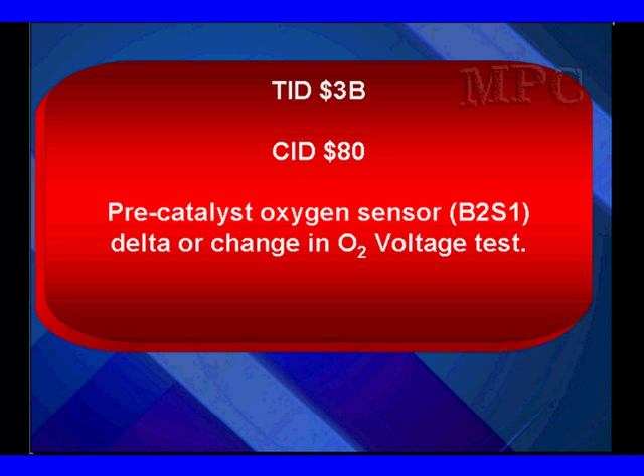This is test ID 3B, component ID 80. It's the pre-catalyst oxygen sensor, B2S1, showing the delta or change in O2 voltage. Component ID 80 indicates we have a minimum limit.

This is the left or front, transverse mounted engine sensor, when your dual O2 sensors are used for fuel control. The PCM times the change in O2 voltage during warm-up.

Special note to remember: JTEC sensors have 5 volts present when they're cold, but you can't measure them with a lab scope and you can't measure them with a generic scan tool. You may want to go back and review the JTEC O2 sensor operation section.

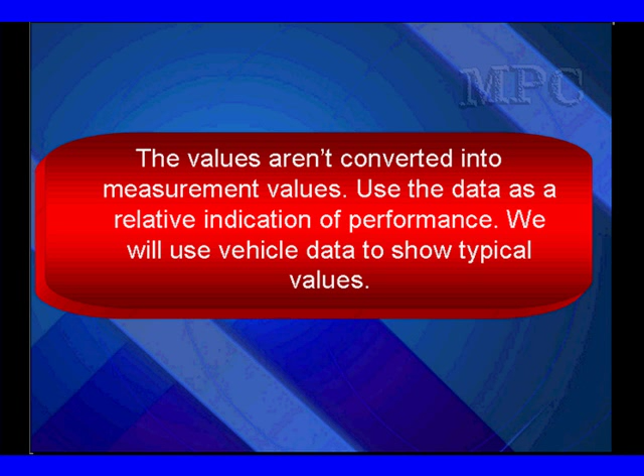The values aren't converted into measurement units by Chrysler, so use the data as a relative indication of performance. We'll use actual vehicle data.

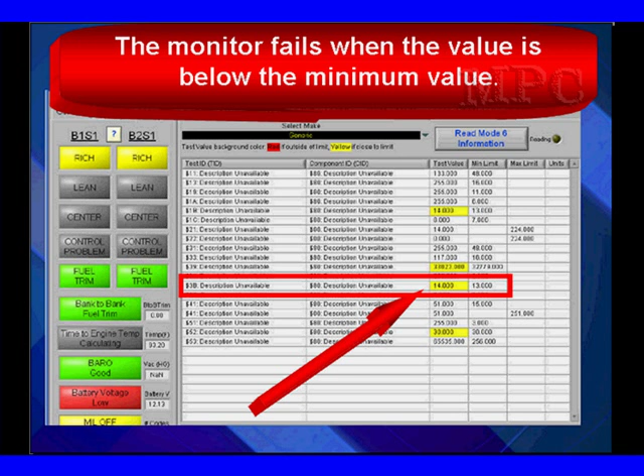Take a look at our 3B here. Under test value, highlighted in yellow, is 14. Under the minimum, to the right of it, is 13. We are barely passing the minimum spec. Now, you may want to test this because this looks like an impending failure.

As we take a look at these, we're going to be using a lab scope, and we're going to look at all of them. Right now we're looking at fuel control. Take a look at that - that's up there, that's where we turn the key on. At key on, the voltage jumps up. If we look at the scale on the right, we found it's about 1.8 volts.

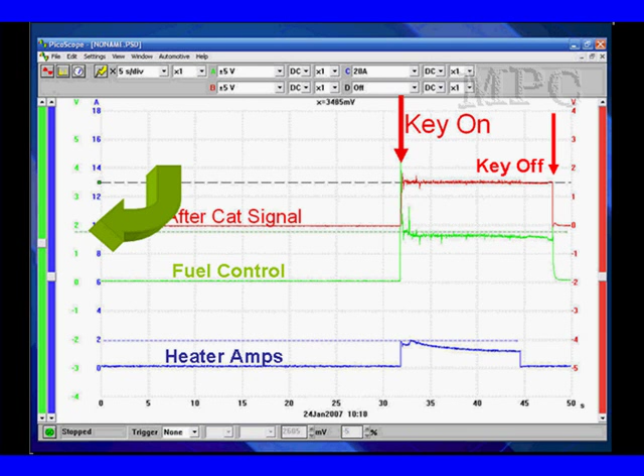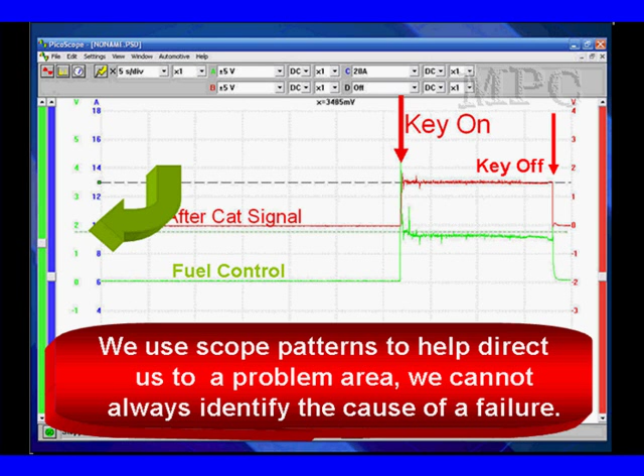We're showing you all these things because we're going to be using all of them together, including heater amps, during our analysis with a scope tester. So we're going to use scope patterns to direct us to a problem area. We can't always identify it with some of these patterns, but in this case it's pretty accurate. Let's go look at our scope patterns to see how to verify this heater performance.

We're going to start off this test drive totally cold and see what happens. We're graphing the fuel control in green, catalyst in red, and the heater current is in blue.

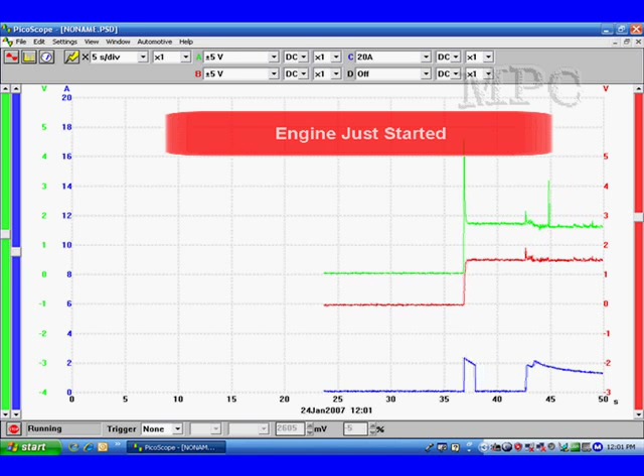We just started the engine and we just noticed our first activity. We're going to stop and talk about this when we get it in the center of the screen, because there's something unusual about JTEC O2 sensors. Let's take a look at the voltage levels on these two sensors - we'll stop it here and have a look at it. The fuel control is just under 2 volts and the catalyst monitor is about 1.5.

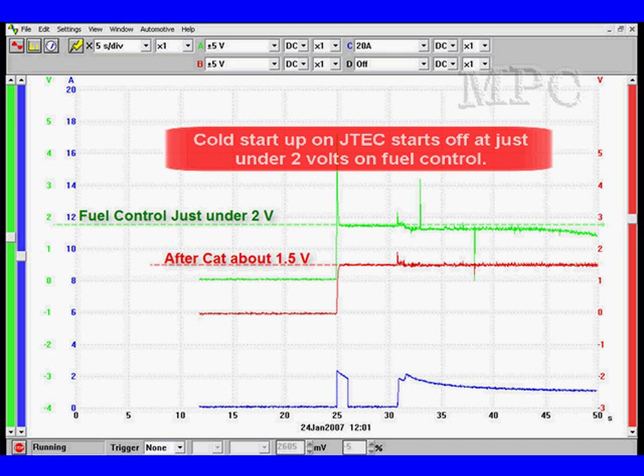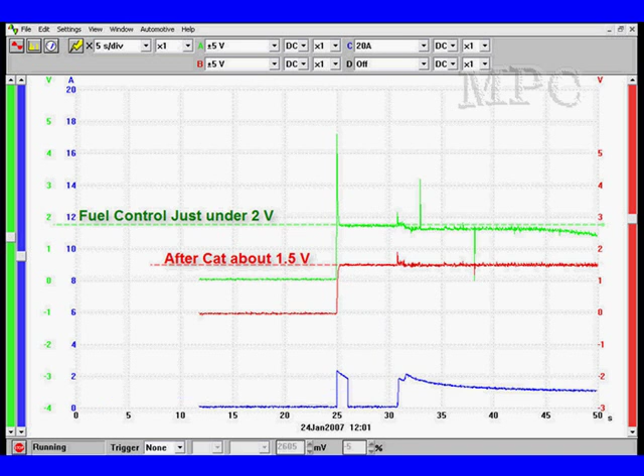Cold startup on JTEC does not start off the same as other sensors, so that's something we need to keep in mind. We notice that the heater current is about 1 amp by the time we get to the end of this scale. Let's start up and let this run again and continue studying this.

What's going to happen is we're timing - this is a test timing to activity - and we see the first of the activity starting to happen now on the green trace. We're dropping down in voltage scales. Once we get under a volt, we need to change scales so we can see true activity. But this is the first sign of activity.

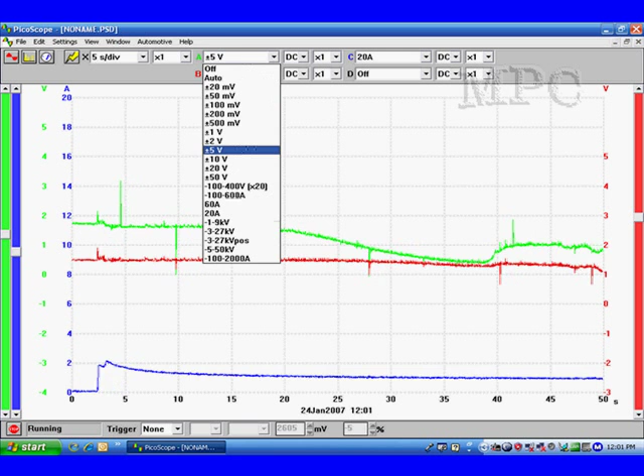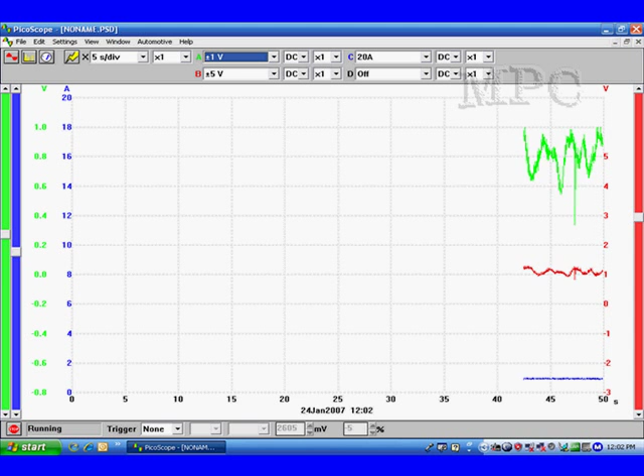Notice that our heater current is staying constant - this is a test of heater current. The heater is what's responsible for heating this up. Now we start seeing some movement. We're going to go down to the 1 volt scale so we can really see what's going on with our fuel control. As you can see coming across the screen, we are now entering fuel control and we have activity. So since this was a time to activity, this is the end of your test.